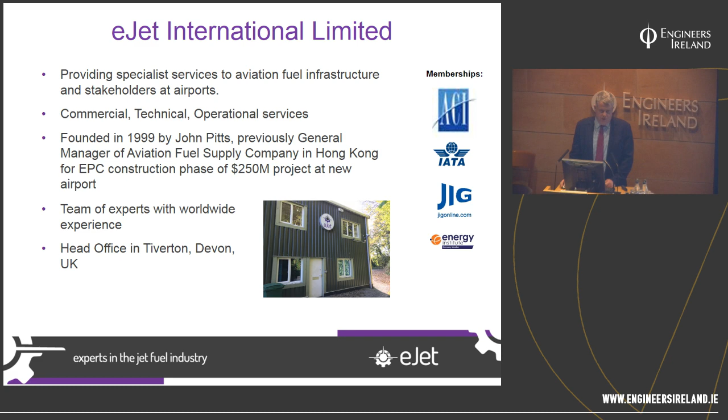Since then, eJet has been based in the Far East and now back in the UK. We're based in the southwest of England, and we cover the world from that base. The international aviation industry is global by its very definition, so we tend to work wherever airport developments are taking place. And in truth, airports are developing universally. All airports are by some measure growing, as air transport and the demand of the flying public shows no tendency to abate.

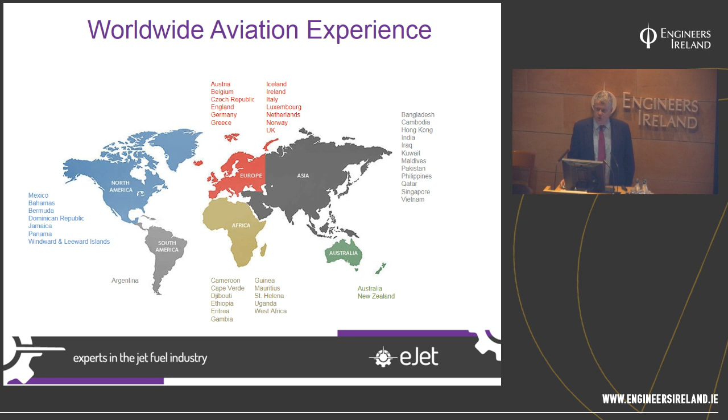Aviation fuel, if you think about it, is pretty well the only component of flight which doesn't have any redundancy, which is not duplicated. Aircraft have multiple engines. They have redundancy in control surfaces, several hydraulic systems, several electrical systems. There are 2 people in the cockpit and they each eat different meals. The fuel comes from one place, and it therefore has to meet and adhere to extremely stringent quality control requirements and must not be corrupted at any point through its journey through the supply chain.

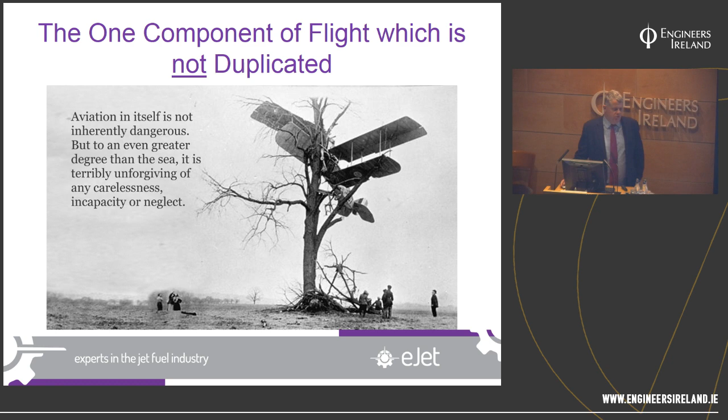In terms of the industry itself, IATA, the International Air Transport Association, recognises about 4,000 airports which offer some form of commercial service around the world. And that can be from the major international hubs like Dubai, Singapore, Heathrow, Dublin, down to upcountry airports where there may be 2 or 3 flights a week.

Beyond that, ICAO, the International Civil Aviation Organization, the UN body, counts about 40,000 airfields where some form of flight is taking place, and some of those are on a commercial basis. So in total, there are around about 100,000 flights a day taking place. I put there are about 100,000 fuelings, because generally commercial aircraft will be fueled before each flight. There's no point flying fuel around the sky because it weighs a lot, so the aircraft will fuel its requirement for the next sector at the departure airport.

It's not always the case. If an airline has any concern about security of supply or fuel quality at a particular airport, it may not uplift fuel at that airport, or if there's a concern about price being uncompetitive, it may bring some of the fuel it requires for its next sector with it from the previous airport. So airlines have some form of choice, but in general, each flight is fueled with a quantity of fuel before it departs.

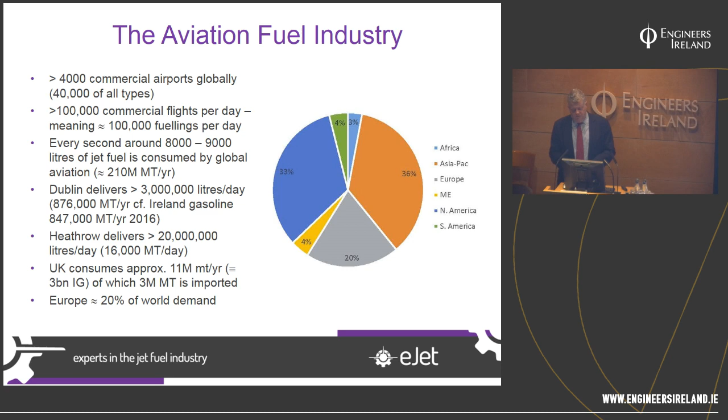A little bit about fuels themselves. What we're talking about tonight is jet fuel, which is a kerosene type material. It's almost exactly the same as heating oil you might have at home, barring a few differences, and those differences are specifically the quality control requirements placed upon that fuel. Jet fuel doesn't move without being accompanied by a certificate attesting to the quality of the fuel in question. There are several types of jet fuel. It's an international industry and different regions have different specifications, but they're all generally the same, and the industry is trying to harmonise jet fuel standards with degrees of success.

In this part of the world, in Australia, in most of Asia, most of South America, it's Jet A1. In the USA and soon to be Mexico, which is undergoing a shift, it's Jet A, which is a very, very similar type of product. It differs in two particular characteristics, one of which is its freezing point, and the other is to do with its static electrical characteristics. As a world volume, Jet A1 is the most important type of jet fuel. The GOST and the other types are Chinese and Russian types of jet fuel.

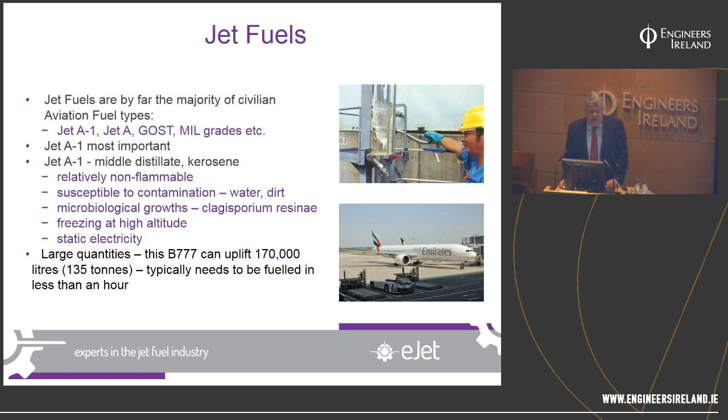The other broad family of aviation fuels are gasolines. Similar to petrol, in an automotive sense, used in spark ignition engines. And these tend to cause more of a headache than perhaps the small volumes that they represent justify. But because they're used in small aircraft, general aviation, generally aircraft with a single engine, they need to be monitored very, very carefully. If the wrong fuel gets into one of these small aircraft with a single engine, it's going to be a big problem, and there have been a number of accidents as a result of misfueling.

So the industry is very, very vigilant to ensure that the wrong grade of fuel does not get onto the wrong type of aircraft. With large commercial aircraft at a major airport like Dublin, it's relatively straightforward because only Jet A1 is handled on the major parts of the airport. There are selective couplings that mean that the wrong hose cannot be connected to a particular aircraft type. But with small aircraft like this, which are fueled over the top of the wing through an orifice, it is possible, and it has happened, that jet fuel has been mistakenly fueled into an avgas requiring aircraft, and there's been an ensuing incident or accident.

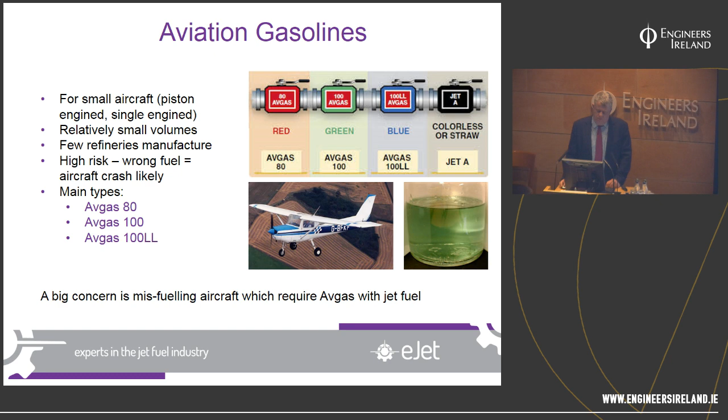There are several types of avgas around the world, and the 80, the 100, the 100 LL designations principally refer to the octane rating. It's similar to the octane rating of petrol. It's not exactly the same because an aircraft engine has to perform under different conditions from a car. They spend much more of their time at maximum power, and the operating conditions are very different because at altitude temperature is lower than on the ground. They have to be able to fly through clouds without failing, etc., etc. So it's very different from the performance requirements of road vehicles.

The largest tank is in the belly, the centre wing tank, and that is the tank that is not always or even often filled unless it's an extremely long-range flight, because bending relief from the weight of the fuel in the wings helps offset the weight of the fuselage, and therefore the further outboard the weight of the fuel is, the better the cantilevering effect, and the lighter the wing structure has to be.

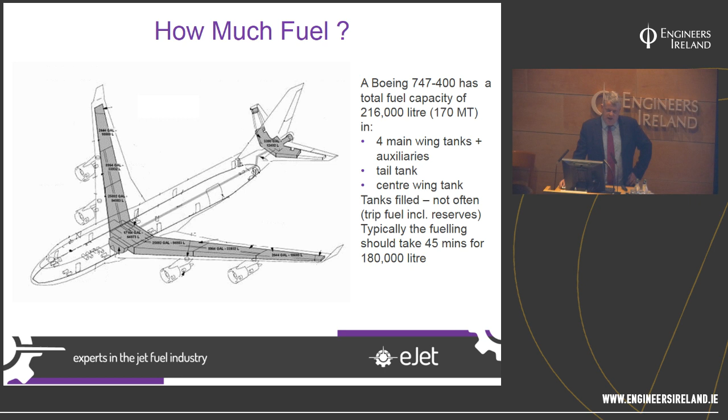As I mentioned, in order to achieve the turnaround times that modern airlines require, large quantities of fuel have to be put onto aircraft in a relatively short turnaround time. I'm going to go on to explain how that is done in a moment. Firstly, looking at supply chains, they are quite complicated. Fuel always starts at a refinery.

And when I say always, that's probably a guarded statement, because now we're looking at fuel components from other sources, and the starting point might be a forest or a cornfield, because renewable fuels, sustainable fuels, biofuels are becoming a reality and can enter the supply chain on a drop-in basis. In other words, the fuel that is manufactured in a sustainable way has to look and smell exactly the same as jet fuel from a traditional source and be dropped into the supply chain. So it may enter the supply chain at another location as opposed to a refinery.

I said that supply chains are complicated. They're getting more complicated. It used to be the case that oil companies refined crude oil into products. Those products were distributed through pipelines, in ships, by train and by road, to intermediate storage terminals, or perhaps directly to an airport. And once the fuel reaches the airport, it's then delivered to aircraft in one of two main means that I'm going to describe.

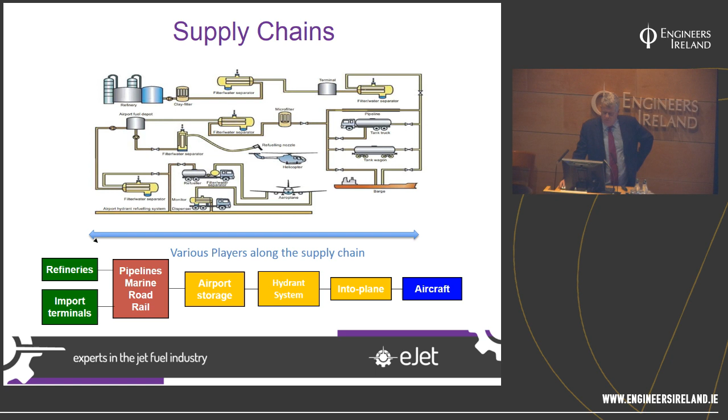Looking at the airport, and this project at Dublin was concerning tankage and storage at the airport as much as anything else. Fuel tanks at airports can be very large indeed, and the ones in Dublin are right up there with class-leading airport sizes. Tanks can either be vertical or horizontal. At any major airport, the tanks are going to be vertical. Horizontal tanks, as in the bottom left-hand corner, are relatively small.

These tanks, and they're photographs from Hong Kong, are 10 to 20 million litres each in size. There are various sizes there, and that can only be achieved by vertical tanks in the order of 25 to 40 metres in diameter and about 20 metres high. So they're considerable structures, and Ibon's going to talk about the developments in Dublin in a minute.

In order to satisfy the fuel quality requirements, tank design for aviation is quite specific. And what you can see on the sketches and what you can't see from the photographs, firstly, is that the tanks don't have a flat bottom. They have a cone down bottom. It's a relatively gentle slope, 1 in 33, but that is intended to allow movement of any water and dirt that by gravity drops onto the tank bottom.

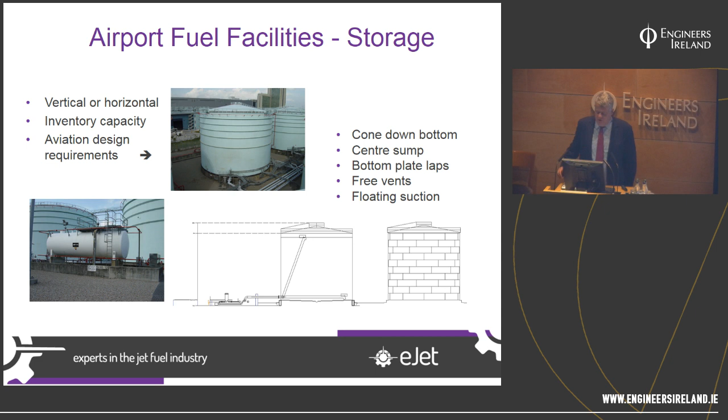It's intended that they draw from the cleanest point in the tank, which is the top level of fuel in the tank, on the assumption that the dirtiest or the least clean fuel will be at the bottom. So floating suctions are a key requirement of the industry. Some pictures of tank construction and the internals of tanks.

Tank shell plates are butt welded together to form a concentric ring, and each strake of shell plates is butt welded to the one below and the one above it.

In order to avoid water traps, to prevent the free movement of water down the very shallow slopes towards the centre sump of a cone down bottom tank, the roof of a tank should be self-supporting, and that presents sometimes some structural issues because it's much easier to put internal columns to support the roof. So a self-supporting structure over the size of some of the tanks that are required can present some challenges.

Tanks are also internally coated with an epoxy material in order to keep the surface smooth, to show up dirt and to allow dirt and water to move by gravity towards the centre sump. And you can see some pictures here of the inside of some tanks. Of particular interest is the left-hand picture, because it shows a pipe support structure.

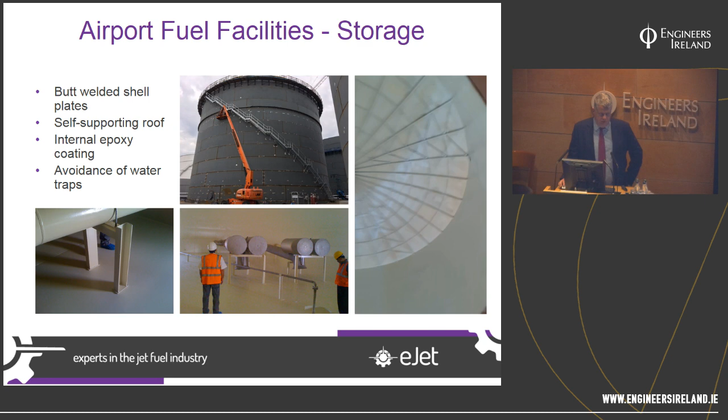How does fuel get from tanks to the aircraft in question? There are two main ways. One is a tank truck, which may be called variously a fueler or a bowser. These are pretty well always used at smaller airports, and to some degree at larger airports, where the other type of fueling, which is hydrant fueling, may not be present in every case.

They tend to be large vehicles, they tend to be cumbersome, they tend to have a high wear and tear component, because a fueler at an airport is loaded to a heavier weight than the comparable vehicle would be allowed to be on the road. And turning radii on airport aprons are generally more severe than on the road. So wear and tear of driveline components and of the driving surface is also greater for these vehicles.

Most airports require at least one of these vehicles for what is called defueling, which is, as opposed to fueling an aircraft, putting fuel onto it, taking fuel off an aircraft if the aircraft were to go into the hangars for maintenance. At such times the aircraft would require the tanks to be empty from a safety point of view. So defueling of aircraft is, particularly at major maintenance bases, a required activity.

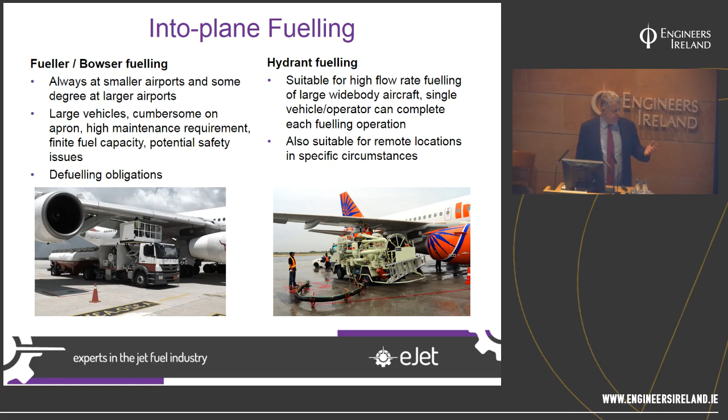The small vehicle on the right-hand picture would be capable of fueling that aircraft on the left-hand picture on its own in the required 3/4 of an hour period. Far less congestion on the apron, far less obstruction to other agencies who are trying also to service that same aircraft with catering, with baggage, with toilet facilities, etc. The smaller vehicle is much more efficient.

A little bit of detail on the vehicles themselves and how fuel passes from them into the aircraft. The Bowser in the bottom left-hand picture is what's called a low-profile vehicle. It will fit under most aircraft wings, and that's a safety issue. Not all Bowsers can fit underneath all aircraft types. The vehicle has a filter. Yet again, the fuel is filtered as it passes through the supply chain.

The bottom right-hand picture shows a hydrant dispenser, and it's connected to what we call a test rig, which is a device to simulate aircraft fueling so that the safety devices on the vehicle can be checked at regular intervals.

The detail in the top right-hand picture shows 2.5 inch hoses connected underneath the wing of the aircraft. Large commercial aircraft are fueled under pressure by underwing fueling points, as opposed to the small monoplane single-engine aircraft we saw a few slides ago, which is fueled over the wing. Modern commercial aircraft, pretty well without exception, are fueled underwing by hoses, as shown in this picture.

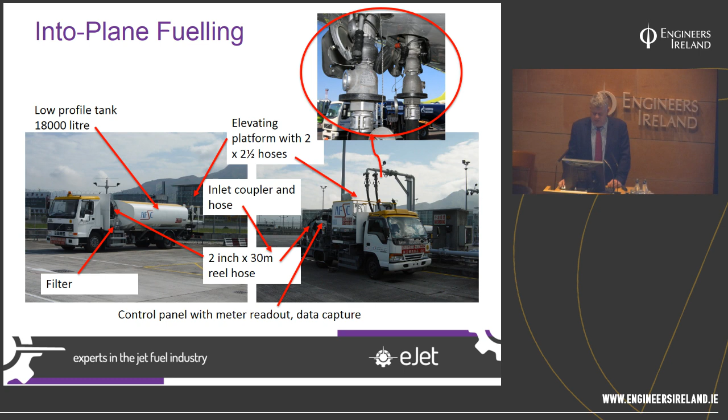Finally, the hydrant system itself. It's a pressurized network of pipes that run underneath the airport. The lower picture shows the hydrant being constructed in a trench. That one is about 3 meters below grade level. Hydrant lines never run truly horizontally. They always run on some form of sawtooth profile, again in order to move any dirt and water to a point from which it can be purged, what we call a low point in the hydrant system. So hydrant systems longitudinally are always running on an upwards or a downwards profile.

The drawing shows a riser coming off the main hydrant line, and that main line, depending on the flow rates that the airport has to support, may be anything from 10 inches in diameter, 250 millimeters, up to 24 inch or 600 millimeters, or even larger. Some lines in Schiphol in Amsterdam are 28 inch, and I believe in Abu Dhabi, the current terminal developments are even larger than that.

Flow rates, total flow rates through these systems can be quite considerable. 50 to 60,000 litres a minute in the peak hour of fueling at a major airport are not uncommon these days. And airports generally show some peaking in fueling activity throughout the day, whether it's a nighttime set of departures from the Far East into Europe. The peak hour might be at 10 o'clock at night, or at an airport like Dublin there'll be a morning peak as business flights take off, and an afternoon peak when they're back again.

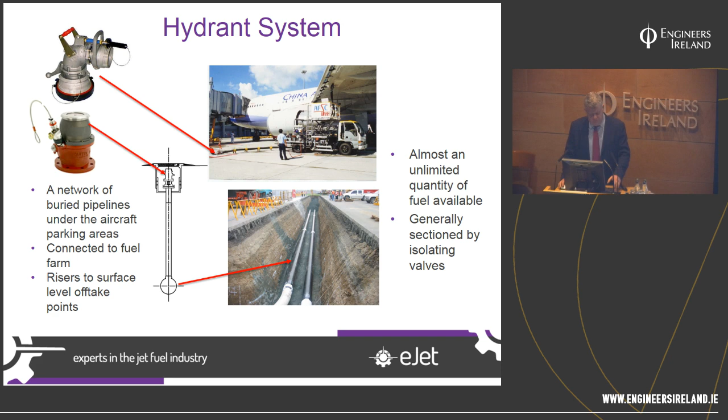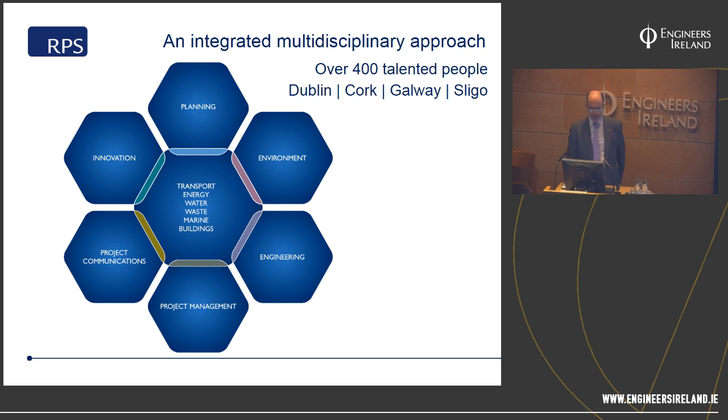Thank you, John. So John has given us a very quick synopsis of what the aviation fuel sector is on a worldwide basis. So what are the issues specifically associated with Dublin? Well, I'm sure most people in the audience are familiar with RPS, so I'm not going to dwell on that one for very long, but suffice to say that RPS consider themselves to be a multidisciplinary consultancy. We even go so far as saying we're a one-stop shop. Maybe not everybody shares that view, but that's certainly our estimation of what we do for our clients.

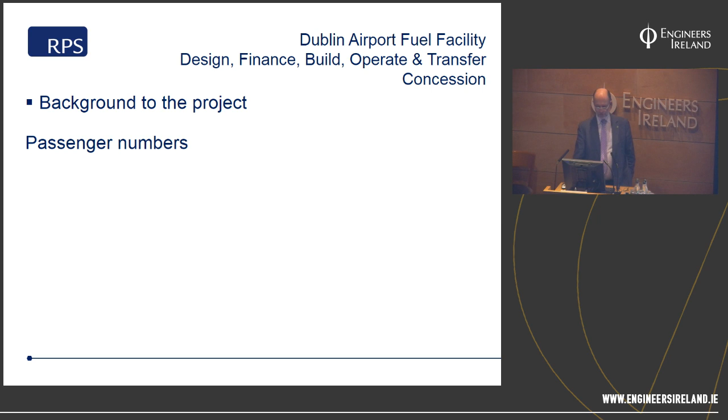So what's the specific background to Dublin Airport? Well, the first context is to look at passenger numbers. In 1950, 212,000 passengers passed through Dublin Airport. And when we were discussing this presentation today, the point was made that in 1950 you could probably drive your private vehicle out onto the airfield in order to get on board the plane. That's how simplistic air travel was in the 1950s. And when I say simplistic, of course, air travel itself was very sophisticated. Not everybody had access to it, but in terms of getting access to the plane, it was a very simple operation.

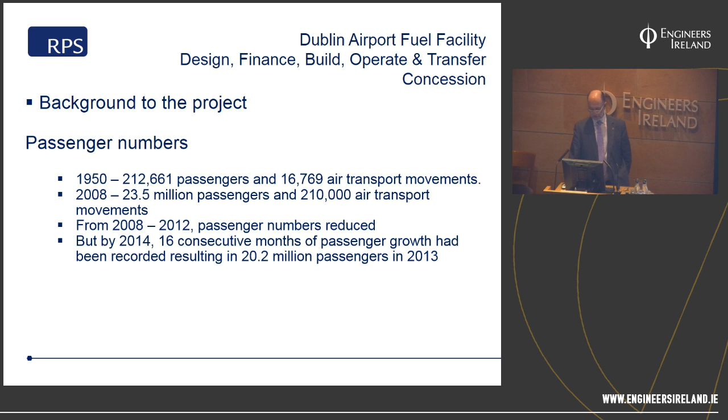By 2008, there had been a hundredfold increase in passenger numbers. So we got to 23.5 million with 210,000 transport movements, a considerable jump from the 1950s. However, from 2008 through to 2012, in parallel with the crash of our economy, passenger numbers dropped off significantly. But by early 2014, there had been 16 months of consecutive passenger growth, and that had manifested itself in 20.2 million passengers passing through the airport in 2013. So you can see that there's quite a bit of fluctuation, and that fluctuation in passenger numbers was mirrored by our economic circumstances here in Ireland.

By 2014, when we were considering the tender process for the project, the projected growth for the Irish economy was of the order of 7%. Now that's a fairly sizable figure when you consider what had been going on for the previous 6 years. And our tender document, when we were drafting it, made reference to an immediate target of 25 million passengers per annum, or PPA. So you can see that the projection in 2014 was that passenger numbers at Dublin Airport were growing, and the ambition was to get to 25 million.

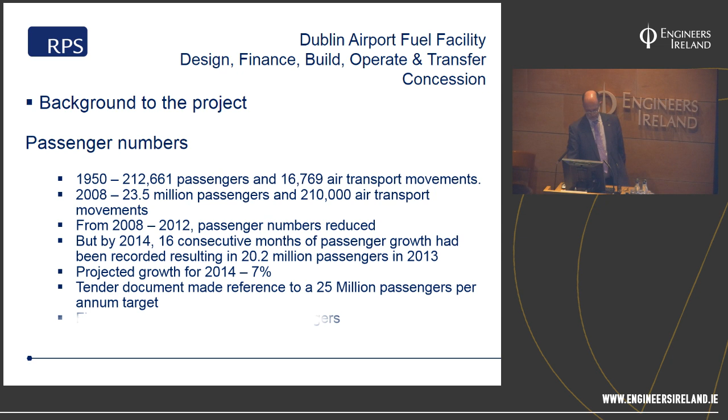But ladies and gentlemen, by 2017, that figure had grown to 29.7 million. So that gives you an indication of the sort of growth that's going on at Dublin Airport. And while we couldn't have known back in 2014 that we would get to that number, it vindicates the decision to initiate the project by which we actually undertook the works that are being described here tonight. And the expectation is that that sustained rate of growth will continue through 2018 and beyond, to the extent that DAA have now modified their passenger number targets initially to 44 million and then onwards to 55 million. Now, when you consider that in the island of Ireland as a whole, there are probably only 6 million of us, that's a fairly sizable number considering the size of the island.

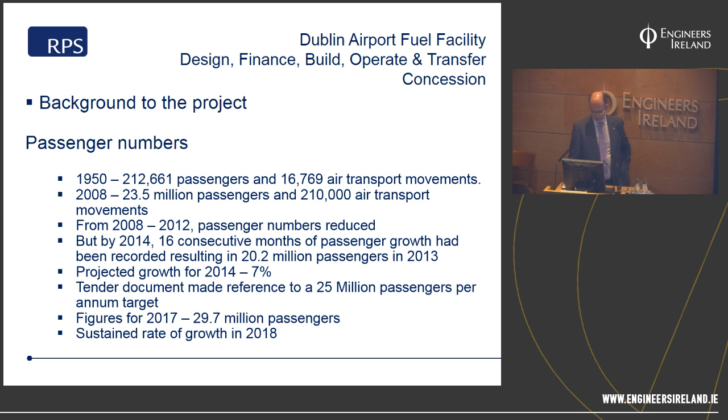Okay, so passenger numbers was one element of it. Fuel capacity on site is another element of the decision to embark on this project, and those are the 3 existing tanks that have been serving Dublin Airport since 1972.

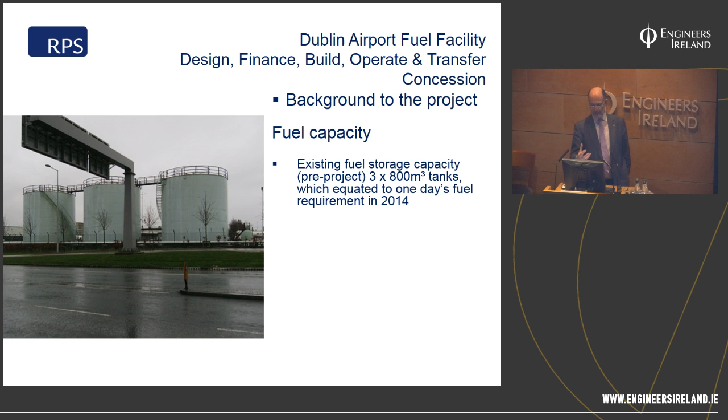They each hold 800 cubic meters, and what DAA were finding is, in the period leading up to 2014, that 2,400 cubic meter capacity was effectively being consumed on the busiest day at the airport. And up until 2014, that was invariably one day in July in the busiest part of the airport's calendar. What we have found since then is in actual fact that there isn't a single day on which the 2,400 cubic meter capacity is exhausted. There are now multiple days.

And in that context, that's why it was critical not only to build the 3 new tanks, but it was also critical to get one of them into operation as soon as was feasibly possible. And when I say that the 2,400 cubic meters was exhausted, it's not that the tanks were left empty at the end of the day.

What we're saying is that the throughput volume on a day's operation in July exhausted the total supply, because the fuel farm currently is being supplied on a 24/7 basis from Dublin Port with a fleet of barges that move from Dublin Port to the airport to discharge their fuel and then go back to Dublin Port to be refueled again.

One of the other consequences for Dublin is that the International Air Transport Association requirement is that an airport the size of Dublin should have on-site 3 days of operating volume. And as I've indicated from the previous bullet point, in 2014 that wasn't the case. So in essence Dublin was not operating in accordance with what IATA considered to be best operational practice.

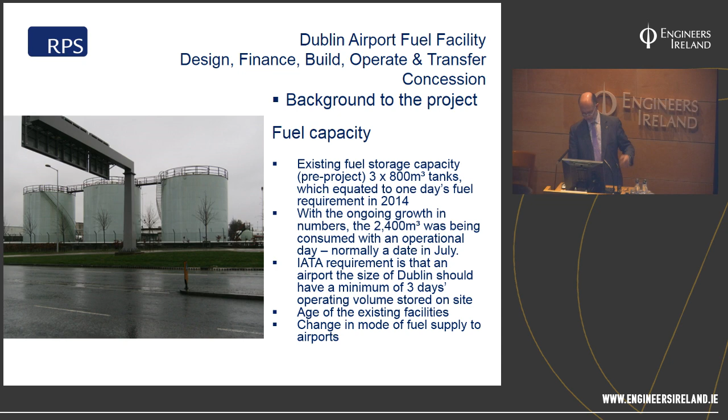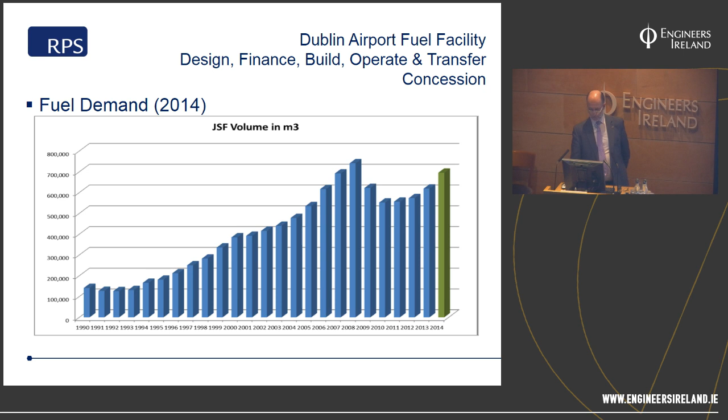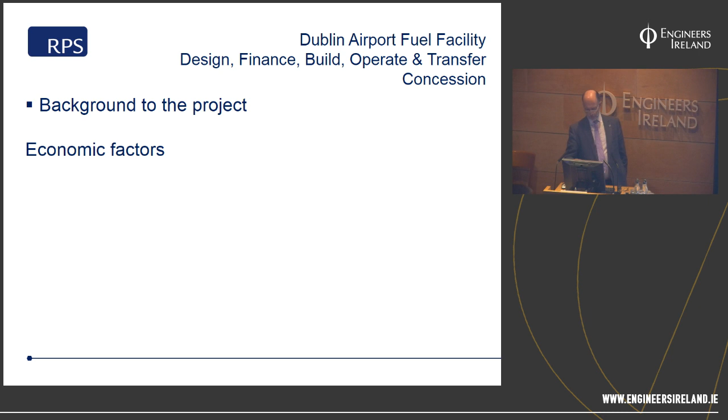And if you look at it there, it's just short of 700,000 cubic meters. And yet we're talking now of a situation where we're getting into a very substantially bigger volume of fuel at present. So we've got a passenger issue, we've got a capacity issue, and let's look at some of the economic factors that influenced the decision to embark on this project.

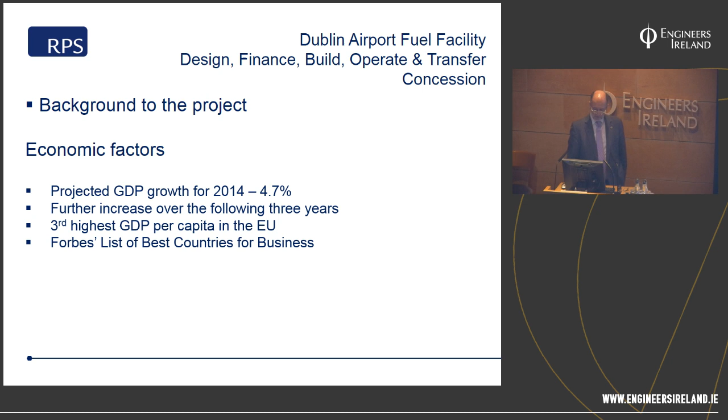Well, by 2014, almost miraculously, the projected GDP growth for Ireland was 4.7%. There was an expectation that that would increase over the following 3 years, and in 2014, we were effectively the third highest GDP per capita in the EU, which is quite an amazing statistic when you consider what was happening beforehand. At that stage, we were in the top 10 of Forbes' list of best countries for business. There was a projection that we would, within 5 years, have 10 million overseas tourists coming to Ireland.

Aviation fuel tax had been removed, which meant that effectively the cost of the fueling operations was going to be significantly changed as a consequence of that removal. And most importantly, Dublin can boast that if you're going westwards to America, you can actually come into Dublin and pre-clear US Customs and Immigration before you actually leave Dublin.

And if you read the newspapers and you follow what's going on in the aviation sector in this country, you can understand why Heathrow is very envious of that facility, and why the perception in the media is that there are machinations that London would like to be able to offer a similar service.

So what we're saying is that in late 2013, as Colman has alluded to, and early 2014, there was a convergence of a number of different factors that effectively justified embarking on this particular project. So it was passenger numbers, storage capacity at the site, which was influencing the operability of the facility, and in addition, the economic circumstances of the country as a whole.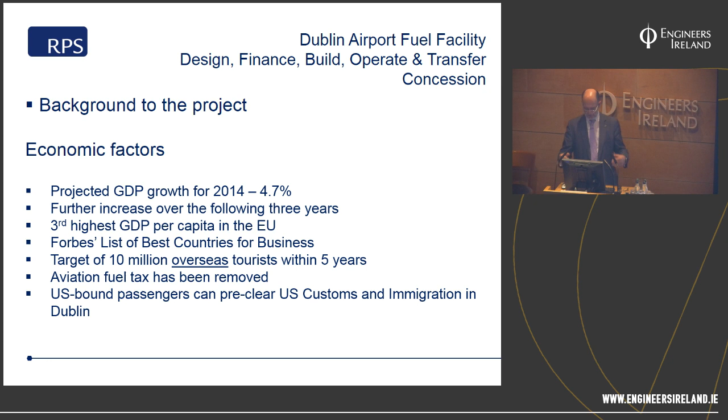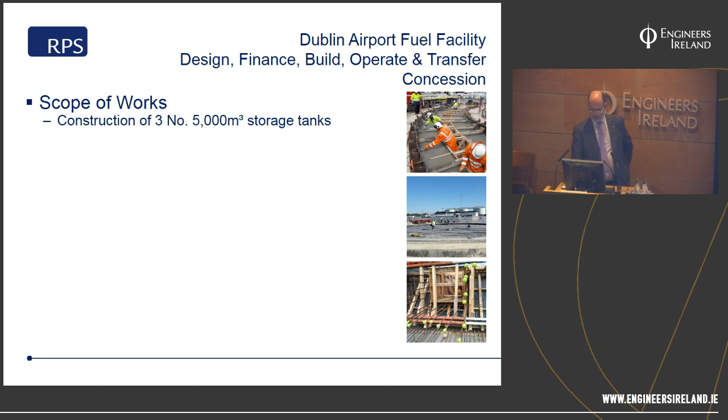So, what did we undertake to do? Well, we undertook to build three 5,000 cubic meter storage tanks. So you've seen the opening slide. There was an undertaking to build a pipeline to Pier 4, and Pier 4 is the pier that effectively services Terminal 2. That pipeline would be extended northwards in order to service Pier 1.

As Colman has alluded to, at Pier 4 there was a hydrant constructed as part of the Terminal 2 works. It had been in the ground in dormant condition since the completion of Terminal 2, and one of the key objectives of this project was, A, to feed it by pipeline from the fuel farm, and secondly to get it operational, and John has explained what the advantages of a hydrant-fed system are in the context of an airport the size of Dublin.

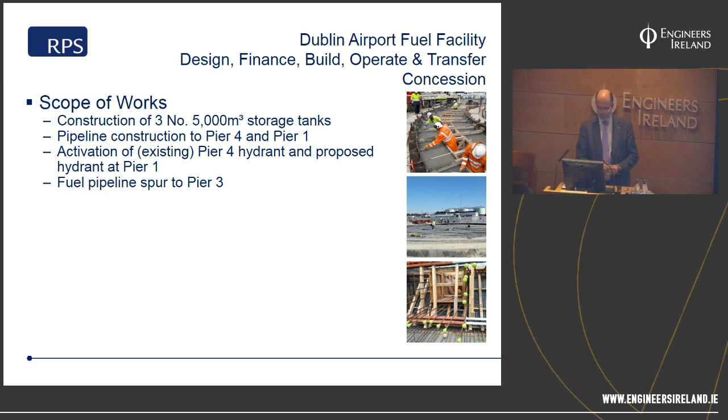Regrettably, and one of the challenges that again Colman has alluded to, is we're going to have to install a hydrant at Pier 1, and we're going to have to install that hydrant under operational conditions. So I'm expecting Mr. O'Leary to come out and supervise the works if I'm not available. Additionally, there is a requirement to provide a fuel pipeline spur to Pier 3 because of the particular requirement for certain larger aircraft to come into Pier 3.

We've had to provide new operational buildings within the footprint of the fuel farm, and this came about as a consequence of a change in circumstance of the project. Originally, the intention was to build an airside hub which would accommodate the operational buildings of the team that manages the fuel farm itself, that housed the into-plane agents who physically took fuel from the fuel farm to the aircraft, and also service buildings and everything else.

And it was originally intended that certain elements of that were going to be built airside, and then very late on in the day, a decision was made that in fact that amount of square meters couldn't be accommodated as a consequence of the airside operations. So in fact, those buildings all came back into the fuel farm. So we had a situation where we were trying to construct new storage tanks, we were trying to put in place new operational buildings within an operational fuel farm.

And considering some of the risks that have been alluded to in the context of that, you can understand some of the challenges associated with QA in terms of making sure that the construction activities didn't interfere with the operation of the fuel farm. And not only did we have to build tanks and put in new buildings within the fuel farm, we also had to redevelop the fueling facilities itself.

We've talked about the change of mode of loading vehicles, that we're actually trying to get away from loading bowsers who then go out onto airside through security control, and instead putting in place a pipeline which is a more effective operation, which means that fuel bowsers, for example, couldn't get stuck at the security gate in order to go airside, because there's a more discreet way of getting fuel to an aircraft faster, more effectively, and more efficiently, without actually having to engage with any sort of ground interruptions or constrictions.

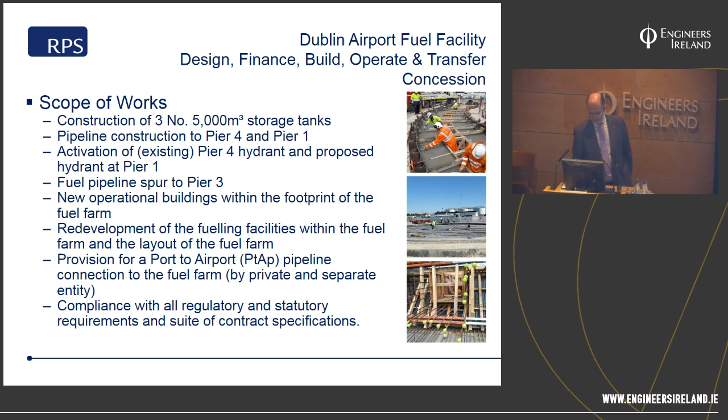We've talked about IATA. We've talked about, for example, you will find later on there are other parties who have a statutory oversight of the project. And of course, given that we're putting in place pipelines, we're putting in place buildings, we're putting in place tanks, there are a whole suite of contract specifications.

So, time for a picture. This is the foundation for one of the first tanks, which was tank number 3. The foundation was a very simple U-shaped cross section of reinforced concrete. As you say, it's a fairly dense reinforced section, but it's not particularly complicated.

The channel between the two concrete sections is effectively a drainage channel, and then to the left of the reinforcing where the ladder's sitting, it's effectively a donut. So what happens is inside the core of the donut, so to speak, is backfilled with gravel and stone and everything else in order to provide a sort of flexible bottom to the tank in accordance with the cone characteristics that John alluded to in his presentation.

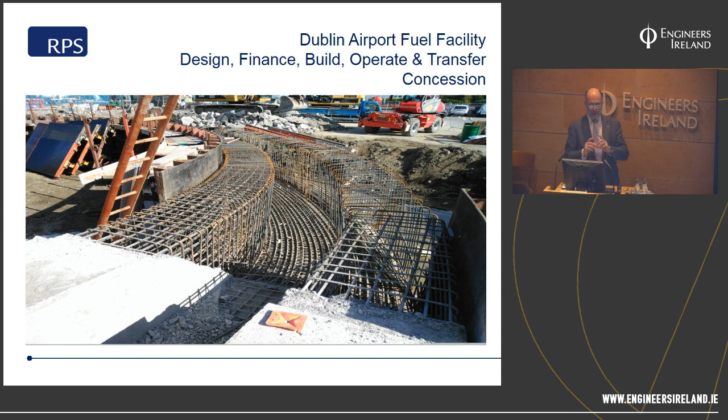So this tank was put together in the summer of 2016. The first tank, number 3, the foundation was poured in 3 different sections, and then we subsequently poured it in 2 sections, not to accelerate, you don't use accelerate in a construction environment, but to reduce the window of construction for the foundations.

Dublin Airport Authority is a multifaceted organisation. We have airport operations, landside operations, the fire brigade, police, planning, finance, strategy. And all those entities within DAA had to be consulted about the project, what the implications were for them. And that led to some of the changes in what we were proposing to do from a works perspective.

We also, as Colman has alluded to, engaged with the airlines because the airlines had a significant influence in how we were going to configure the works. For example, the decision to go with 3 tanks came directly from the airlines in particular. And also we had to engage with the current entities on the site, for example, the into-plane operators who were taking fuel from the fuel farm out onto the apron. We had to deal with the fuel companies.

Obviously, from a statutory point of view, we had to deal with the Commission for Aviation Regulation in Ireland, Fingal County Council and IATA, whom we've referenced before. And from an external perspective, even though Dublin Airport has its own firefighting capacity, facility and personnel, Dublin Fire Brigade are a key element in case of an emergency scenario.

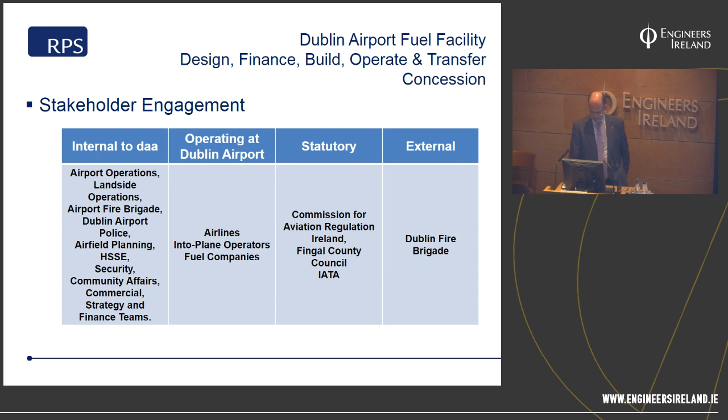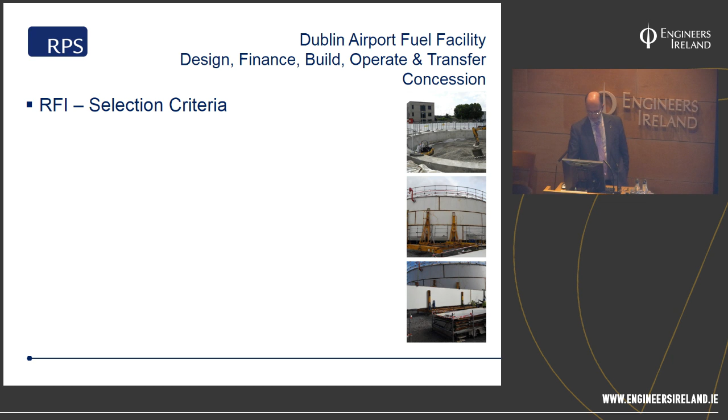So it was a multi-party, internal and external stakeholder engagement, and all of them had to be involved, consulted, and afforded the opportunity to contribute to the formulation of the documentation by which we actually initiated this whole tender process. So we had a 2-stage tender process: an RFI, request for information, followed by an RFT, request for tender.

And there were 2 critical aspects of the RFI. The parties who expressed an interest had to have experience of at least one fuel facility where they were operating an aviation fuel farm and hydrant with 500,000 cubic metres per annum demand. If you weren't able to prove that, you couldn't qualify from the RFI process. And there were aspects associated with turnover.

So we had a requirement that the aggregate turnover between the operator and the contractor would have to be the order of 35 million. And the aggregate assets of the operator, the construction contractor and sponsor, in this context effectively the financing entity within the consortium proposing to do these works, had to have the financial capability of 94 million.

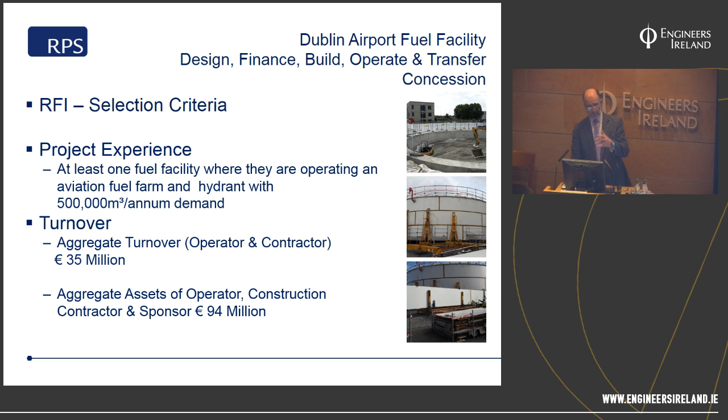From that RFI process, 3 parties were identified and subsequently qualified to go forward to the RFT process. And of those 3 parties, one of them is represented here tonight, and we're going to find out from him shortly what his circumstances were as a consequence of qualifying and subsequent appointment. To give you an idea of the timetable, the RFI was issued in October 2014, with the RFT issued in February 2015.

So effectively, the RFI required documentation, a questionnaire, hoops for the potential candidates to jump through. We then had to evaluate it, so the technical consultants, DAA and the legal team were part of the evaluation process, and on the basis of their collective evaluation, the parties went forward to an RFT, which was issued in February 2015, with an expectation that the tenders would be returned in May 2015.

And during that period, there was an opportunity, and in fact it was a requirement, that we would sit down with the qualified parties and actually have almost like a mid-term report back as to where they were in the process, to make sure that they were on track. And of course, as you can imagine, there was a fairly liberal question and answer scenario given the context of what we were trying to achieve at Dublin Airport.

The concession was awarded in October 2015, and that was followed with the contract award in April 2016. And you might ask, well, what happened between October 2015 and April 2016? There's a slide coming down the line which is going to detail what happened during that period. But it wasn't just a case of, well, here's a price, go and do the work. It's a multifaceted aspect to this, and I'll elaborate on that one shortly.

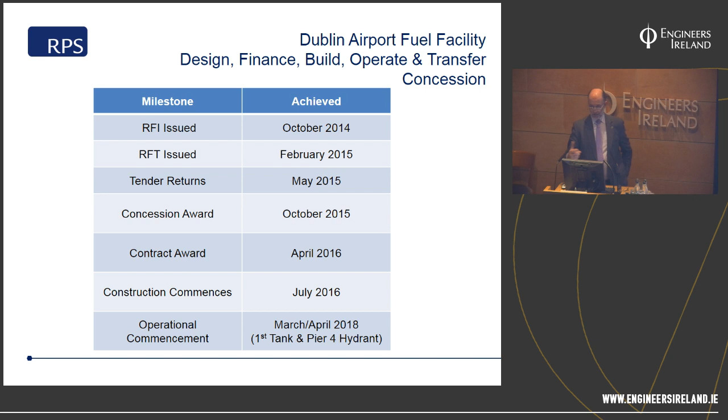Construction ultimately commenced in July 2016, and from an operational perspective, the first tank came online in March 2018, and the Pier 4 hydrant was commissioned in April 2018. And currently, the 3 new tanks are all in operational order. And from an airside perspective, what we're currently doing is extending the pipeline from Pier 4, going northwards, ultimately connecting through to Pier 1 and the provision of a

I don't mean any disrespect to my client. I'm not foolish enough to actually do something like that when there are at least two of them in the room.

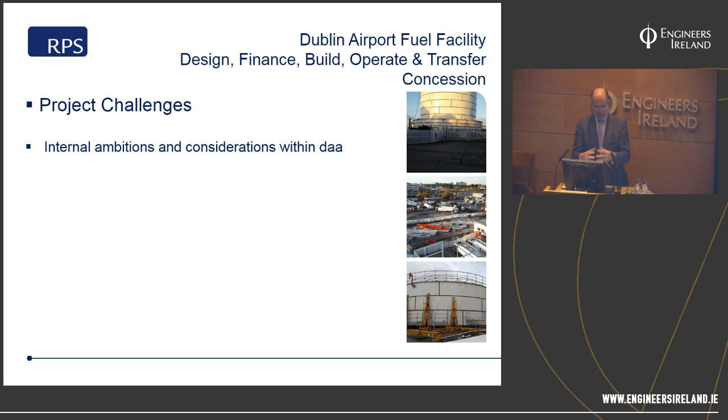But it's a multifaceted organisation. There were different internal ambitions and different considerations within DAA. So airside operations will have one perspective of the project. Landside may have a different perspective of the project. And we had to make sure that both those entities could substantially achieve their ambitions. And I don't mean that in any disrespectful way at all.

There's a late change to the configuration of the proposed works, and I have a drawing coming up shortly. And there was a multi-dimensional aspect to the tender submissions. So we had to look at financial models, i.e. the concessionaire, the O for operate, the F for finance. In other words, we were looking for a party that was going to do everything on this project. They were going to design it, finance it, build it, operate it, and transfer it. So it wasn't just a tender to bill of quantities.

There were technical proposals to be assessed. John has made reference to the design of tanks, the design of pipelines. We had to ensure as DAA's technical consultants that the drawings and the proposals that the successful concessionaire brought to us were in compliance with DAA's expectations, with the industry's expectations, and with design codes and practice codes and everything else.

There were legal and employment undertakings to be considered. We had the into-plane agents who are already on site. We had fuel suppliers. We had DAA itself. So there were lots of legal and employment undertakings, and we've made reference to the different suites of documents that were put together.

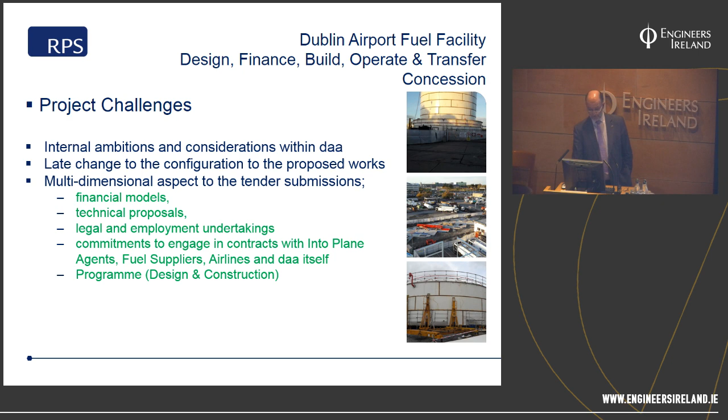And not only did we have to look at the legal and employment undertakings, we had to renew contracts with the into-plane agents, the fuel suppliers, the airlines, and DAA itself. And of course, there was a very substantial program of design and construction before we physically got onto the site to start carrying out the works.

This was the original configuration that was expected. The yellow square on the far right of the picture is the fuel farm as it existed in 2014. The idea was the yellow line that comes out of the bottom right-hand corner of the fuel farm and makes its way to the second block of yellow colouring. The intention was that that second block was an airside site at which we would establish an office for the into-plane agent, agents, plural.

We'd establish an office for the concessionaire who was going to run the facility. We were going to look at putting in a vehicle service building in that vicinity as well. And then the intention was that the pipeline would then continue across the bottom of the page as you see it. There would be the red line connection to get into the pink hydrant, the pink line, which is the hydrant underneath Pier 4, and you can see Terminal 2 at the top of that picture.

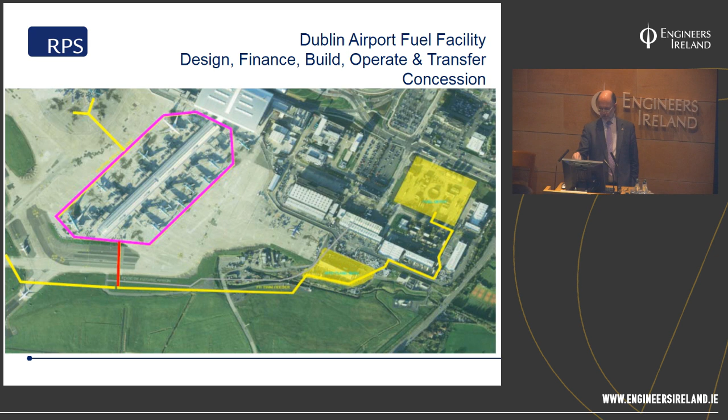Then there was the offset in order to go into Terminal 3, or Pier 3 rather, which is the yellow line in the top left-hand corner. And in the bottom left-hand corner, the extension of the yellow line and its onward passage up to Pier 1. So ultimately what happened was the yellow block at the bottom of the page, that disappeared, and the buildings that were intended to go into that location effectively went back into the fuel farm. So we had a situation where 3 new buildings had to be constructed within the fuel farm while it operated on a 24/7 basis.

And this is a photograph of the second and third foundation. So the foundation at the bottom of the page, you can see that the concrete foundation has been completed. You can see that there's gravel being inserted between the 2 concrete walls, which is the drainage mechanism. And then there's a membrane underneath, and the idea of the membrane is that the membrane will collect any leakages from the actual tank itself, and then they'll be put into a dedicated drainage mechanism that takes it outside the tank. So in other words, the concessionaire can monitor whether he's got a leakage problem on the tank.

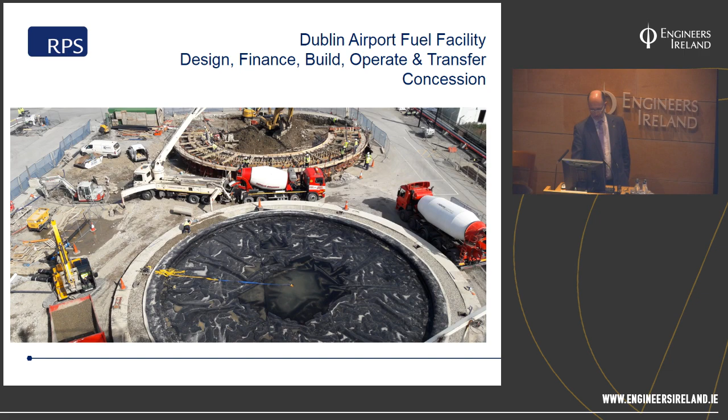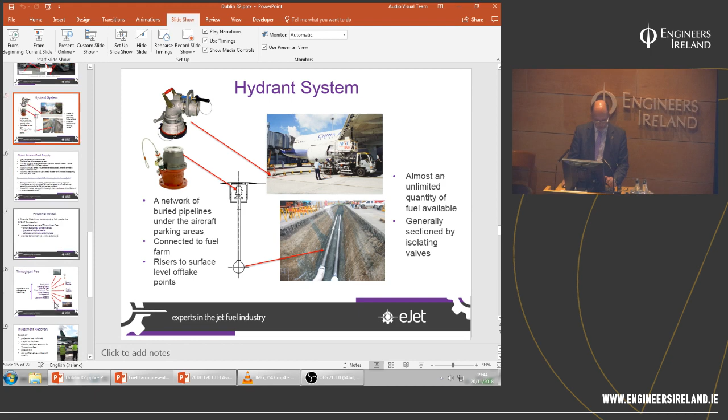Thank you, Cormac. I'm just going to quickly go through some of the commercial and operational issues that surround this concession. Starting with the point that fuel represents about 30% of an airline's operating cost. Depending on the price of fuel as it varies from time to time, it's a substantial part of an airline's cost base. And therefore airlines put a lot of attention into the cost of getting fuel to their aircraft, and the costs on the airport are particularly of interest to them. I would say there's been a traditional lack of transparency on what those costs have been. And from the 1970s, there were moves to try and change that, particularly in the United States.

What we're talking about more and more is opening of the access to airports so that multiple fuel suppliers have the opportunity to supply fuel to airlines. Hong Kong was the first truly open access airport outside of North America. And what it meant was that any fuel supplier who met certain commercial and technical qualifying requirements could supply fuel to airlines. Even the airlines themselves could act as their own fuel supplier, and they could, if they were that way inclined, go to the spot market, buy a cargo of fuel, and have the right to bring it into the airport.

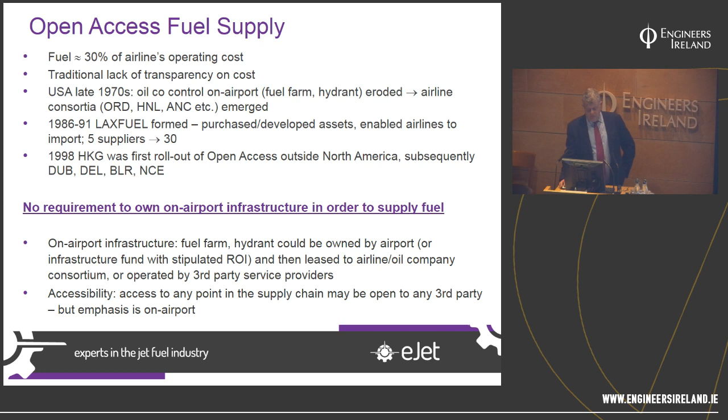Mention has also been made of financial model. We put together a financial model in the tender preparation so that we could assess the levels of cost that this model would put on the airport operation. Fuel, as I said, is very important to airlines in terms of cost. It's also important to airports because if fuel is expensive, it means that airlines are not going to lift as much fuel from that airport as they might do.

I mentioned at the very beginning that airlines have a choice and that they could, if they wanted to, not take fuel at a particular airport, but bring some of it with them. That choice always remains, and if fuel costs at an airport are prohibitive, they won't take fuel. They might even cut routes so that passenger numbers might fall.

And for an airport like Dublin, which has other revenue streams it draws from passengers, like car parking, like retail in the terminal building, like food and beverage, loss of passenger numbers as a result of fuel has a knock-on effect that can be quite considerable. So we had to make the economics work and try and predict what they were. And we also had to provide a benchmark against which to evaluate the tenders.

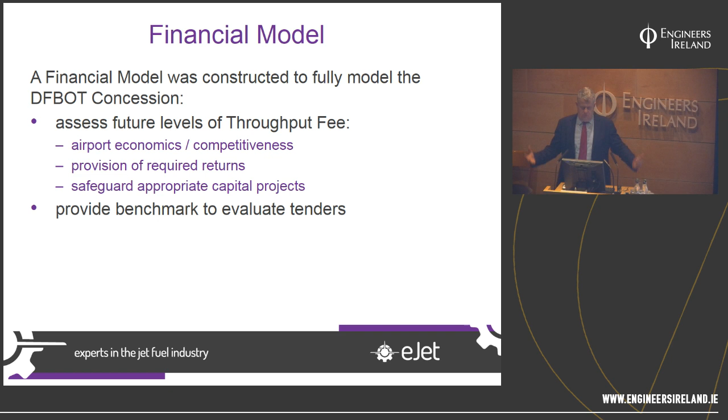We weren't expecting huge numbers of tenderers to respond to this invitation because only very specialised organisations and entities could really respond. Relatively few parties would have the qualifying credentials. So we wanted to try and put together a financial model that would benchmark to give DAA something to measure a relatively small number of tenders against.

The throughput fee is the tariff, which is the cost of using the fuel facility. Every fuel supplier, and if we were a fuel supplier tonight, we'd pay this exact same fee to the operator. We pay a throughput fee on a cents per litre basis, which represents the cost of using that system. The throughput fee is composed of a number of elements. I won't go into them all at this time, but importantly, there is a capital facility cost, which recovers the cost of a multi-million euro facility over the course of the concession.

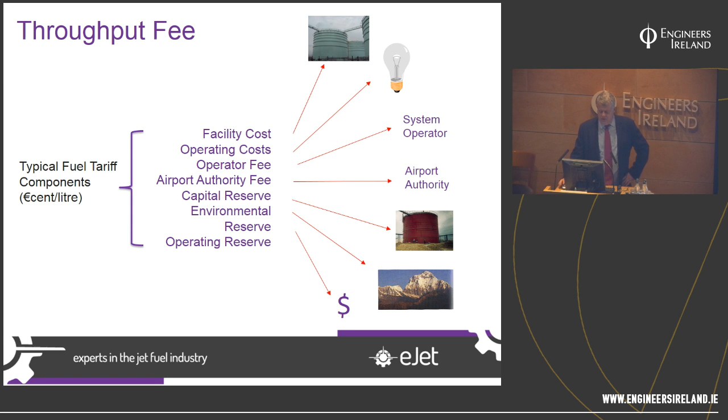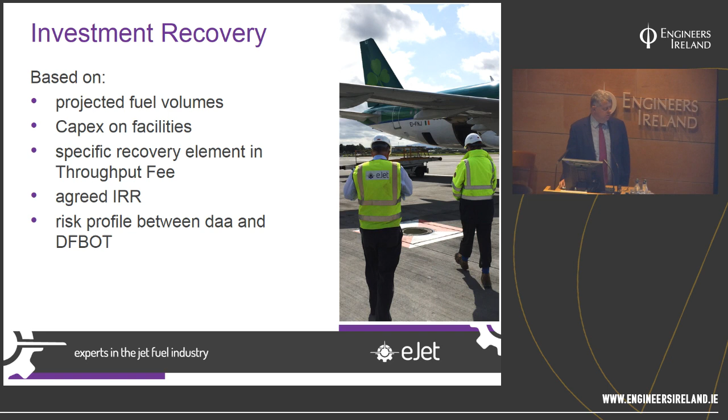There are operating costs that are recovered. Those are utility costs, labour, salaries, insurances, etc. And there's a fee that goes to DAA, and there are some reserves that can accrue. Investment recovery: the investment that is made in this fuel facility is recovered based on projected fuel volumes, which were part of the benchmark of the financial model. There's an agreed internal rate of return, and the recovery is based to an extent on the profile of risk between DAA and the DFBOT concessionaire.

The concessionaire, in terms of operation, is fully responsible for operating the facility and keeping it available on a 24/7 basis throughout the year. The concessionaire also has to provide and maintain and keep open access fuel supply working. They have to qualify the fuel suppliers, so any applicant who knocks on the door and says we'd like to supply fuel has to justify why and how they're able to do that, and that they have an airline customer whose fuel they will take.

They have to demonstrate insurance, and we also have to bear in mind that because it's an open access airport, fuel suppliers can come and go. They can come and they can supply fuel to airlines for the duration of a contract, which may be 6 months, it may be several years, and they may go away again. They may not decide to supply at Dublin again. Quite unlike a closed access airport where the oil companies would be part of the permanent establishment. This airport here in Dublin, with its open access provisions, gives a lot of flexibility.

The concessionaire, the operator, we're going to hear a bit from Ibon later, is what we would call, in legal terms, a bailee of others' fuel. They look after the fuel suppliers' fuel. The fuel suppliers deposit their fuel into the storage at Dublin Airport, and that's the end of their physical relationship with the fuel. The operator stores and pumps that fuel and moves it towards aircraft, and they have a duty of care. They have to look after the quality of the fuel.

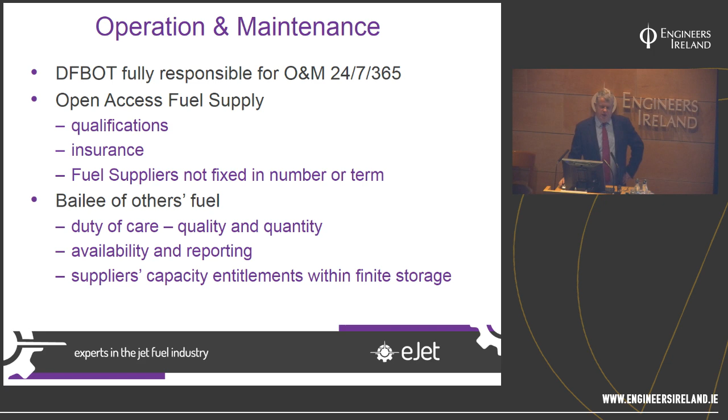They also have to manage a finite amount of storage, because the tanks, whilst big, 5 million litres each, are of finite size. And if fuel suppliers were allowed to store as much fuel as they liked, it would effectively keep other fuel suppliers out. So the capacity or the amount of cubic meters that each fuel supplier is allowed to store is worked out, and it's a moving target because market shares shift, but it's generally based on market share of that particular fuel supplier.

We also had to make sure that the concessionaire complied with industry requirements. There are a whole raft of industry requirements that have to be complied with. Some of these acronyms may be familiar, some may not be. EI is the Energy Institute from the UK, API is the comparable body from the US, American Petroleum Institute. IATA we've mentioned before. JIG is a standards body that arose from the major oil companies and their requirements to inspect each other's facilities when in joint venture.

It is now one of the industry developers of operating standards, and SOPs, standard operating procedures, are important, and we had to specify what those should be in order that DAA could be assured that the fuel facility was being operated on a reliable, safe and efficient basis.

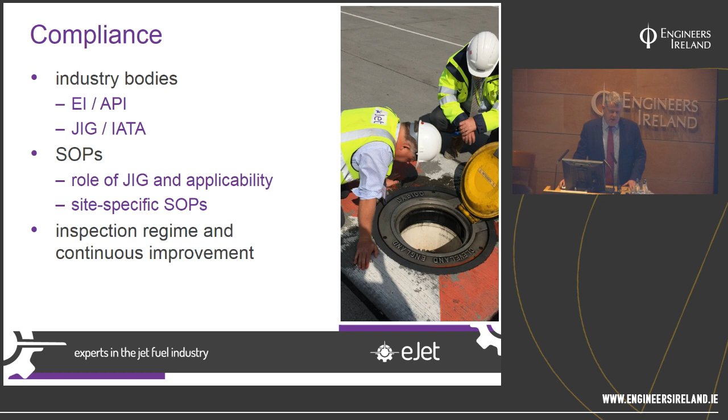And airport fuel operations are used to and subject to inspection at regular intervals to ensure that they're complying with industry requirements, with airline requirements, with regulatory requirements. Fuel is flight safety critical at the end of the day, and it has to be made sure that the operation is safe. I'm now going to hand over to Ibon, who's going to tell the story as the concessionaire and operator.

What I'm going to explain is what is CLH, what is the fuel farm project, the calendar and the construction phase that we're going through, challenges of the project, and a summary of CLH Aviation. So CLH Aviation Ireland was a company created 100% owned by CLH Aviation. That's my former company where I used to work, that is 100% owned by CLH Group.

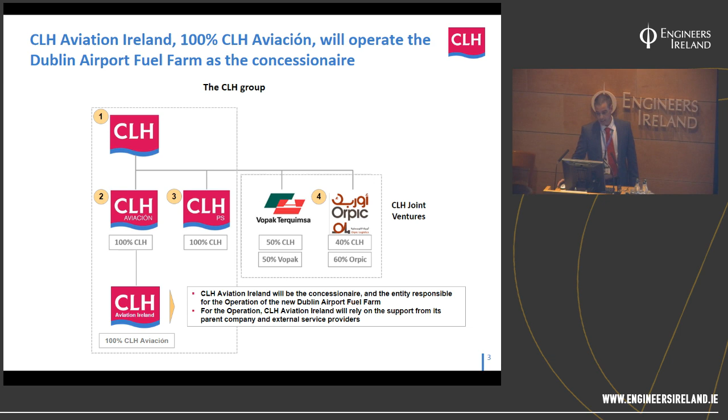CLH Group also owns CLHPS, that is a logistic company in the UK, and we have some joint ventures with a terminal in Barcelona, Vopak, and a project in Oman with Orpic, that's the government of Oman. So to give you a view of what is the CLH in Spain, this is a network of the pipelines, the terminals that we manage, 39, airports, 28, and then also entry points for the logistic network.

So CLH will manage the fuels, all type of fuels, so not only aviation, but also cars, diesel, and others, as a bank. So you can put at an entry point in, let's say, Barcelona port as a supplier fuel, and you can take it out at Madrid Barajas Airport immediately. So it's like a bank account. It doesn't have to wait for the molecules to move through the system. So that is how it's managed.

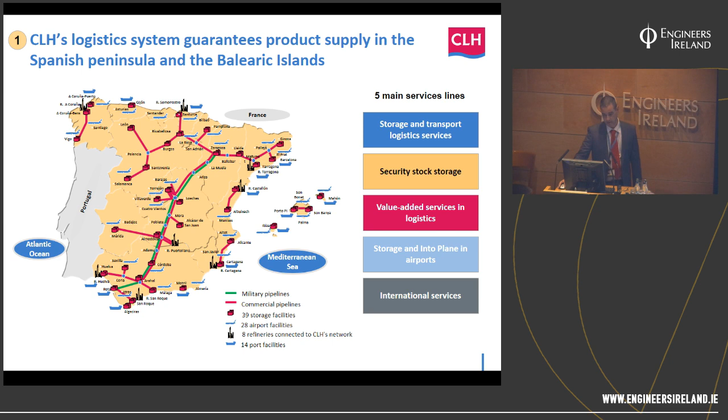Also, because of proximity, I include this slide. So you have a view of the system that we bought in 2015 in the UK, that was the former GPSS logistics system. As John mentioned, we don't own the fuel, we just manage it. We're an open access system, and that's how we've been working since CLH was privatized in Spain in the 90s. And a similar process is going on in the UK. Because they privatized this network, they want a private company to buy it, and that's where we appear.

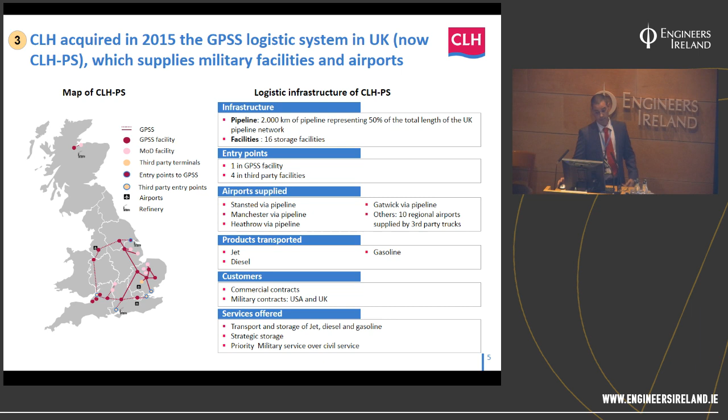This network moves 90% of jet fuel through the network, 16 fuel farms, and actually I'm going there tomorrow to have a meeting with them. Also, we have some other projects going on in aviation in Panama, and we're tendering in some other countries because CLH is expanding internationally. Going to what we want to talk about here, that is the Dublin Airport project.

So similar to Colman, I was invited to the IATA meeting in 2014 that was held here in Dublin. IATA does big meetings for the fuel industry twice a year, and one of those meetings was here in 2014. And we were walking in the corridors and we saw a little stand of DAA saying Dublin Airport opportunity. We're like, let's have a look, what's this about? And here I am. So the project was what they have explained: design, finance, build, and operate a fuel farm.

Because CLH at that moment was looking for opportunities outside, we put a lot of effort in. My boss came to me like, would you like to help me with the tender? And we're like, yes, why not? I've never been in Ireland, so let's go for it. And we prepared the tender, we went through the process that they have explained very well.

And here we are, we were awarded as concessionaires to take over operations in the fuel farm and start building the new fuel farm on the same space where the existing fuel farm was running. CLH Aviation Ireland was a company created to do this work, and I came over here to build it.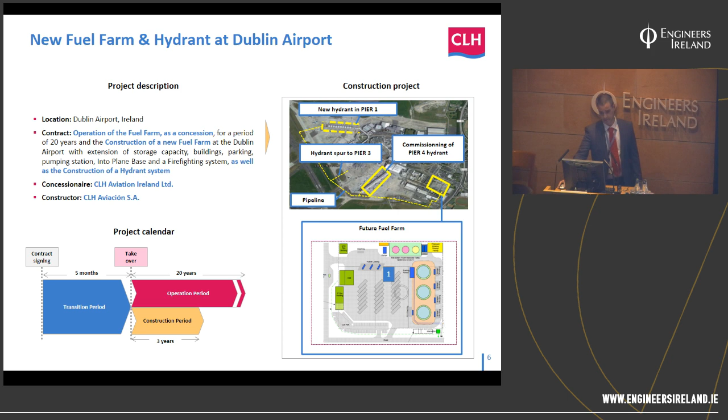That's how the fuel farm looked when I first arrived here. The three small tanks that we have mentioned, old loading bays, some old buildings for the into-plane and the people that were operating the fuel farm, and the offloading bays. And that is how it looks now.

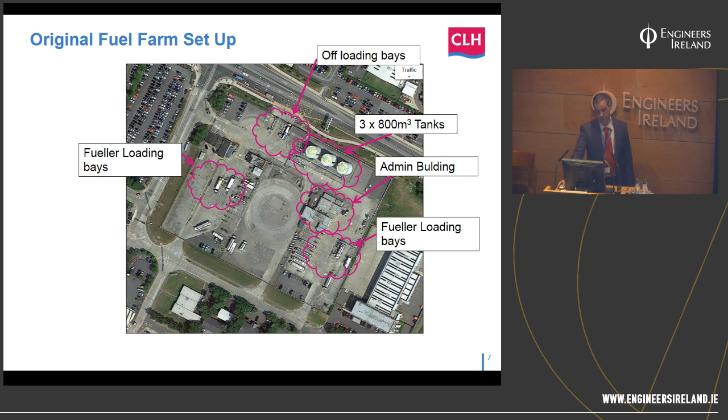As they explained, we have built the 3 tanks. The hydrant system was built by the DAA when they built Terminal 2. We just connected the pipelines to Pier 4. We did a lot of checks because the pipeline was there for several years, so we checked its integrity, that it was clean. As John mentioned, very insistent on that, is the quality; there's no backup for the fuel on an airplane, so we did a lot of checks on the system.

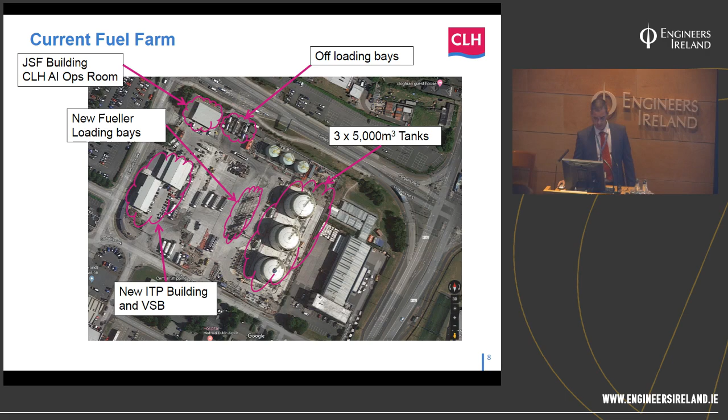And we keep going. There are pending works like the offloading bays, new offloading bays, and we're getting there. That's the view from one of the former tanks that now is a water tank for the firefighting system, with the 3 tanks, the offloading bays.

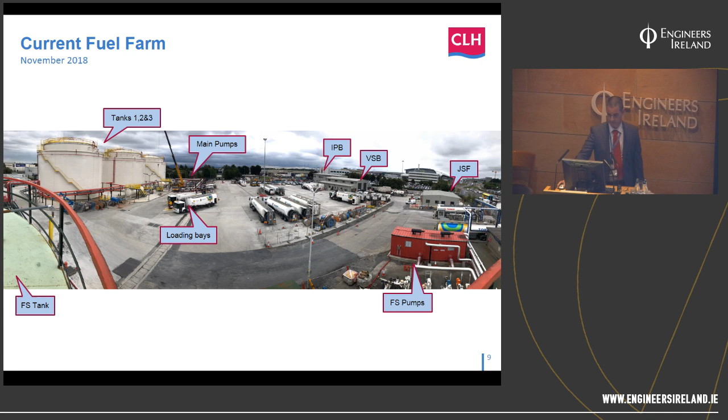As you know, Pier 4 will have all the access for the passengers that are leaving to the US, so they have the pre-customs there. So most of the long hauls depart from Pier 4. Benefit for the into-plane agents, those are the companies that take the fuel from the fuel farm to the airlines, and they will be working on behalf of a supplier that, as they explained, are the owners of the fuel.

The benefit that it has created for them is a lot of saving on human resources, and a lot of saving also on movement of vehicles from the fuel farm to the airport. Going through security can take you like 20 minutes or 25 minutes. And then, I will take San Francisco for example, that was the first plane that we refueled from the hydrant. That could take 3 full trucks of fuel to be filled.

So that is a lot, and as John mentioned, planes make money when they're flying. They have very tight turnarounds most of the time, and the time that it's saving for the airlines on that is very important, because they can reduce the turnaround on the fuel.

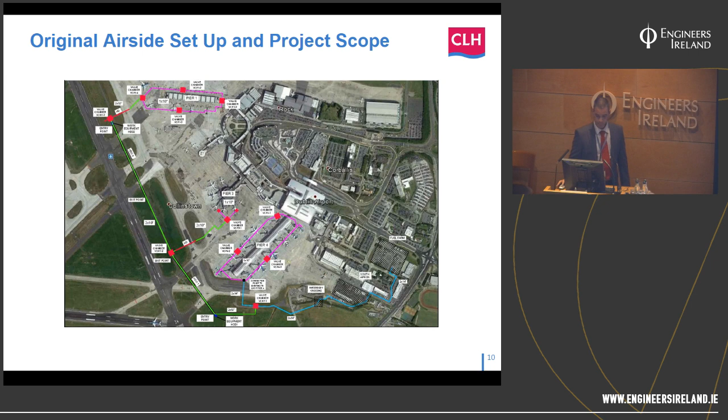The project itself, when we prepared the tender, we divided it in 3 main phases: the transition period, then construction that overlaps with operation, and operation. Operation will be 20 years, because that's what the concession agreement with the DAA said, that we're going to be operating the fuel farm and the hydrant that we are building for 20 years.

The transition period was a window of time between being awarded and taking over operations, when I started coming over here. So one of my first trips here was with HR people, to recruit 12 Irish lads and start building the company itself. Checking how the fuel farm was, learning how it was operated, the equipment, all the facilities that they have, how we could integrate those facilities into our operational procedures and start working from that.

One day at midnight, we took over operations. The former company that was there, I have to say that they helped us a lot to start our activity. We got the books and started running the place ourselves.

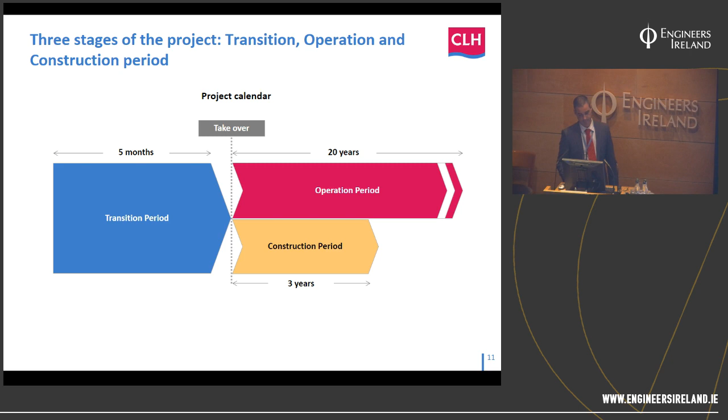At that time, we also started building the new fuel farm, and meetings were arranged with the into-plane agents, because they lived there with us in the fuel farm, to agree things like the commissioning and decommissioning. You cannot decommission something if you don't have that thing commissioned somewhere else, working and tested. So it was a big puzzle, and it was still challenging, as Colman can tell us.

This is a schematic of what's happening in the fuel farm. As they mentioned, fuel suppliers are the owners of the fuel. What we brought to Dublin from day one is open access. Supplier, contact me, let's have a contract in place. Bring me the fuel, I'll take care of it, and then you get it into the plane and put it on the airlines. So the fuel suppliers have an obligation to bring us fuel in spec, good quality.

We check it on each truck, and then we put it in the fuel farm, we take care of it, we do the drains, the quality checks, and we make sure that when they take it at the loading bay of the hydrant, the fuel is good for the airlines. As John mentioned, that is all covered by the throughput fee, which integrates all the services that we give them. We also have a strong level of insurance because of the liabilities you could incur. And we also oblige the suppliers to have a lot of insurance that we check, and we communicate to the DAA if they are in breach of that.

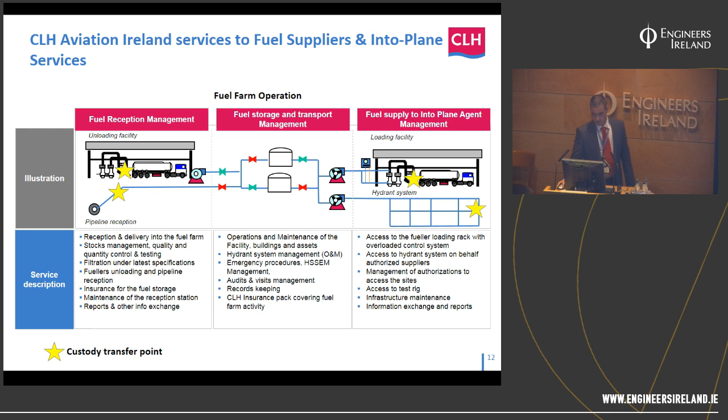When we were preparing the tendering process, we got a lot of data from the DAA, and we identified big challenges to go through. Some of them are shown here, and mainly it was very small capacity and congestion on the offloading bay and the loading bay. And that could have a lot of impact. There was also a lack of backup, like backup power supply and backup equipment in case of something failing. For the shortage of capacity, we put as number one of our milestones building the first tank to fix it as soon as possible. But as you saw, they're big tanks, and it will take long.

So we put as the very first thing to do building a new offloading bay. There were 2 offloading bays, and we identified that the priority was to be able to fill the fuel as quick as possible. So we increased the capacity of the offloading process by 33%, and that helped us to go through summer 16 and 17. In summer 17, we already had the new tank, but the process of filling was the key to keep the operations at the airport. And actually, we went through without any fuel disruption during that period.

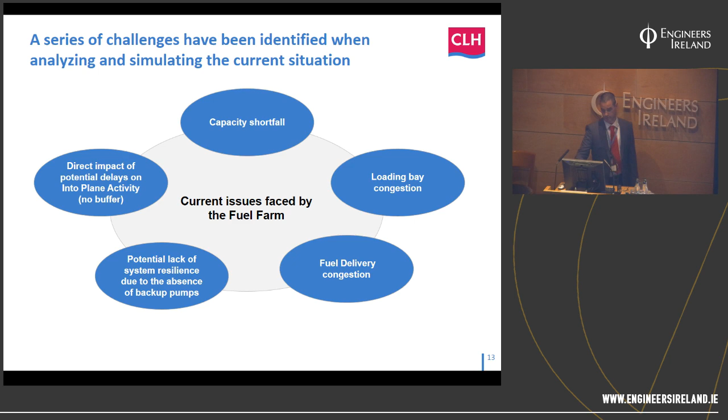During the construction and when we started building the fuel farm, challenges that we went through: we took over operations in June, peak time of the year. So a lot of people came from Spain to help us because it was a day-to-day learning process. During the transition period, we were allowed to observe, but we were not allowed to touch or do anything in the fuel farm. So we just kicked in, with the support of the people that were there previous to us, but it was a learning process. There were things that were not working as we expected, and things that were not as we thought they were. So it was day-to-day adjusting and going through it.

Also, as I mentioned, we identified that there were only 2 offloading bays. What we did is we started commissioning the 3rd offloading bay on a plate on top of a container. The bay came in a ship to Ireland. As soon as we took over operations, we placed it, connected it, and it was working after 3 weeks of operating the fuel farm. And that was a key thing to keep the operations at the airport during the summer of 2016.

Also obtaining the license from the HSA, because the site was jumping from 2.4 million liters to 15 million liters. It was going to a higher level under the COMAH Seveso regulation. So we had to deal with the HSA to get the license. We got the license on time to be able to fill the tanks and the infrastructure as it was built.